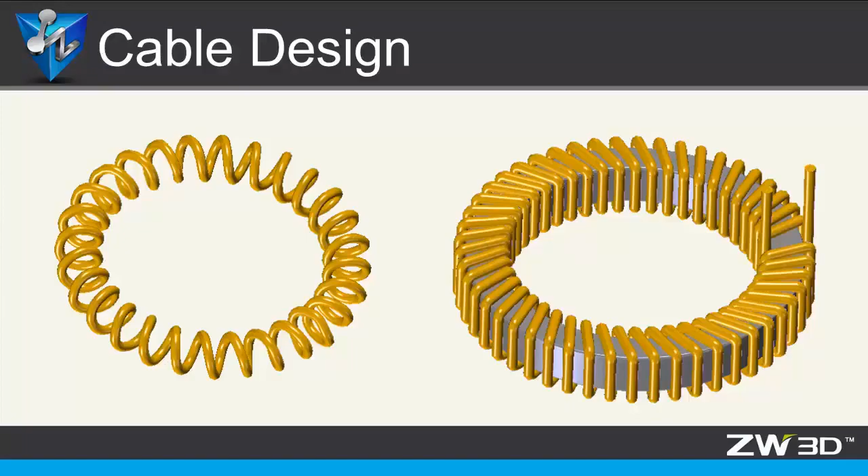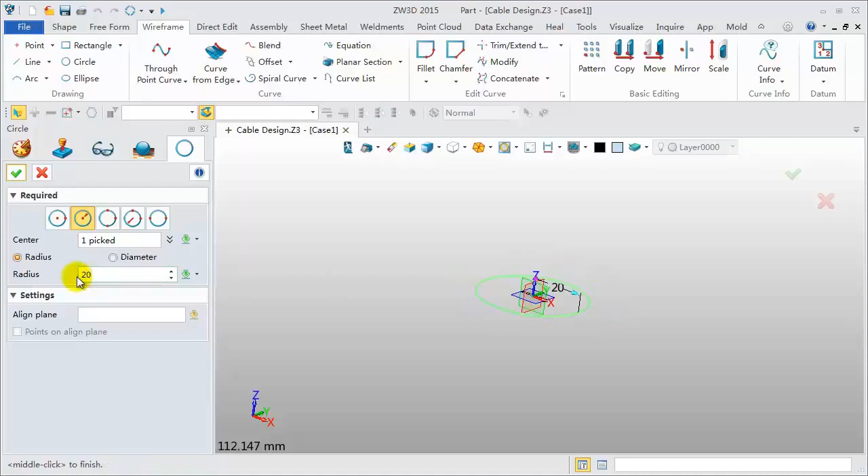Now, let's begin. Create a new file and name it Cable Design. Click the plus icon to create a new object. Name it Case 1. Click Wireframe, Circle. Pick the original point and set the radius to 20 millimeters. Click OK to finish.

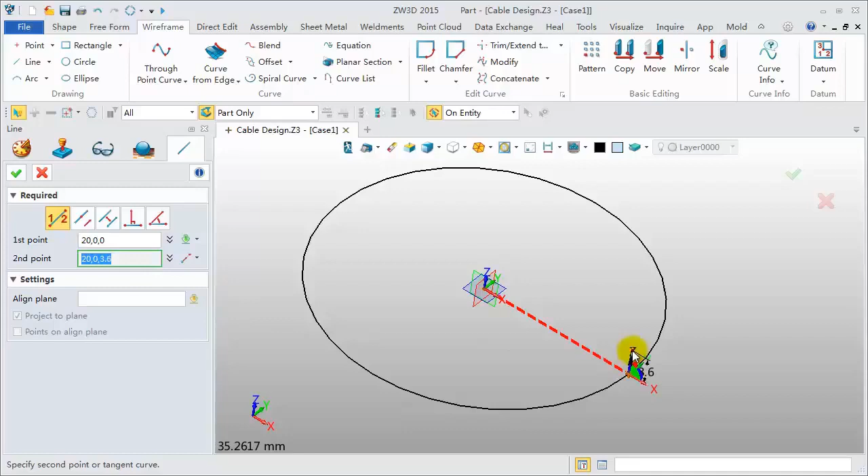Next, create a line. Hovering over the original point, move the mouse along the x-axis to the intersection. Continue to pick the second point. Distance is 3.6 millimeters.

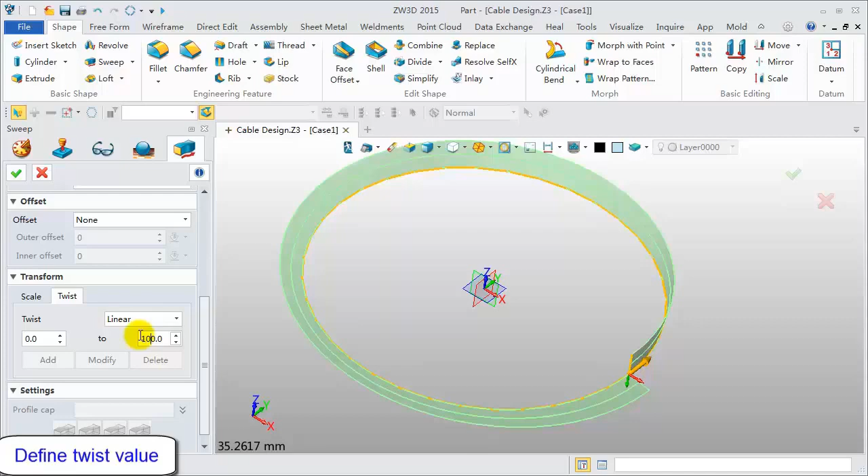Click the Sweep feature. Pick the line and the circle separately. Define the twist parameters. Linear change from 0 degrees to 10,000 degrees. This is the sweep result. Next, use Wireframe tool to extract the curve from the edge. Blank the sweep surface.

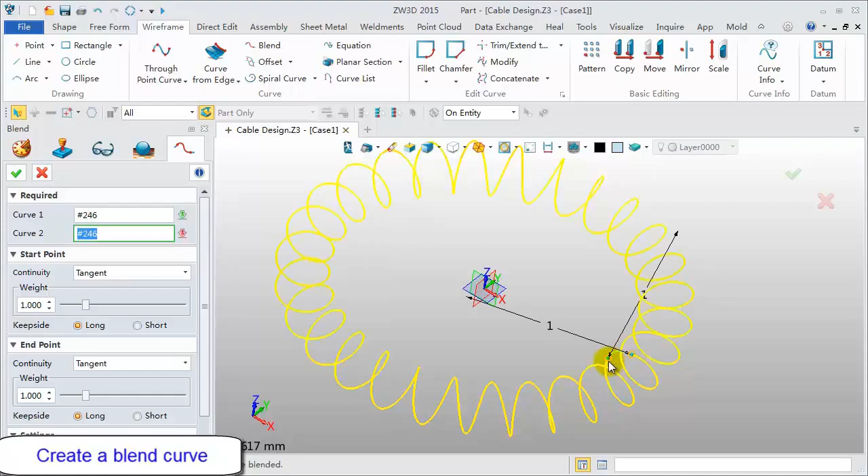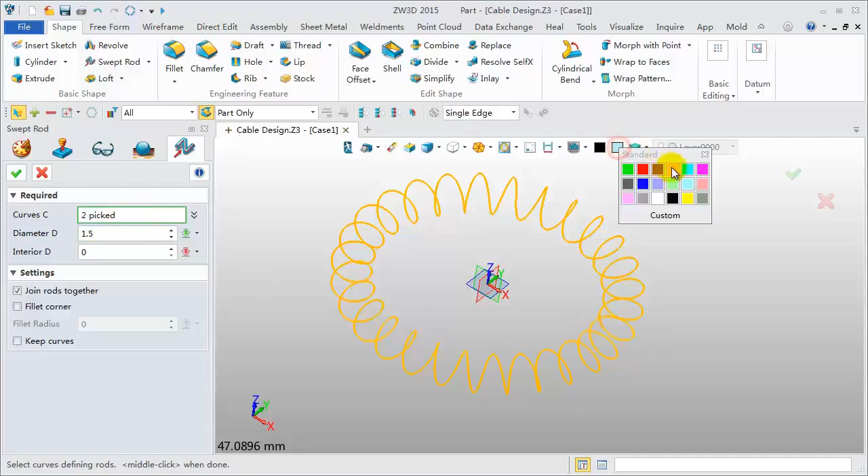Next, click Blend command to create a smooth connecting curve between the endpoints. Last, use Swept Rod feature to create shape. Pick curves. Diameter value is 1.5. Click OK to finish.

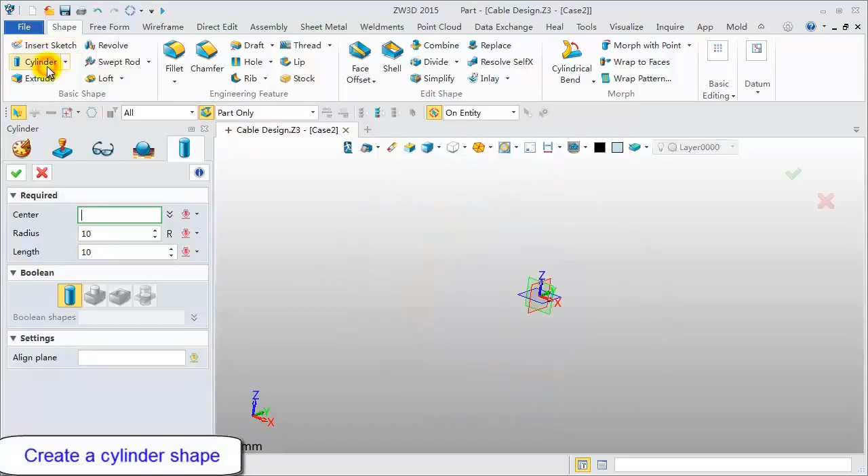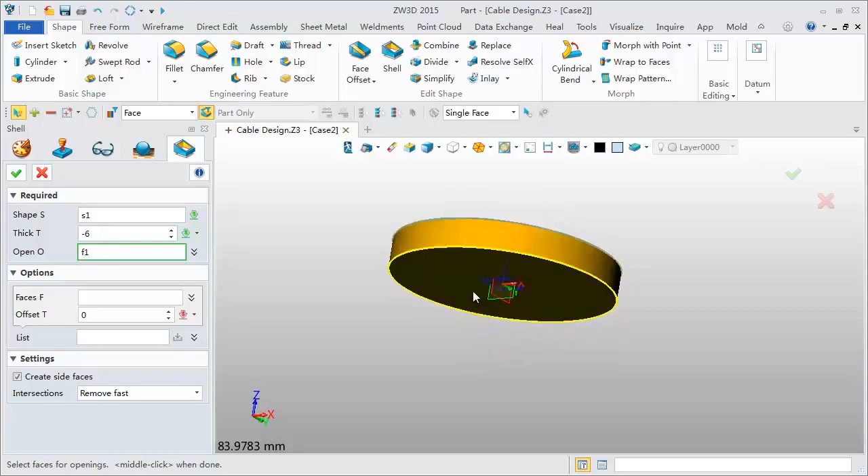Now, we will design another model. Click the plus icon to create a new object. Name it Case 2. Create a cylindrical shape, center located at the original point, radius 30, length 8. Next, do a shell operation. Pick the cylinder, set the thick value to -6. Pick the top face and bottom face as open, and click OK.

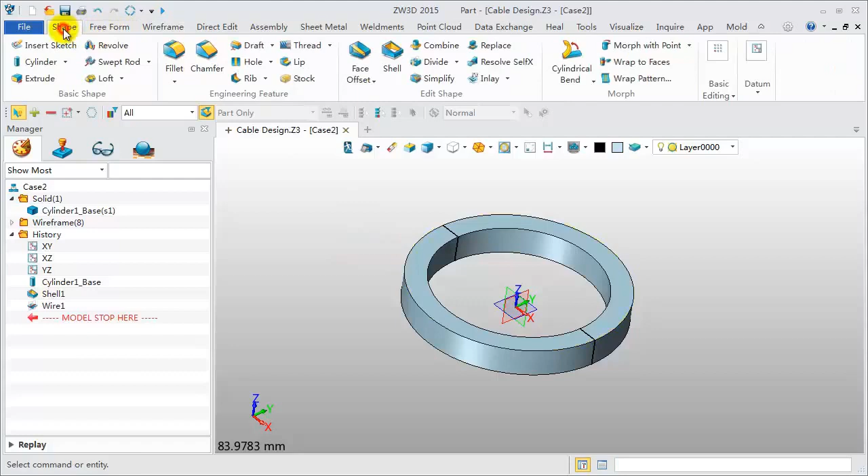Then, we will create the section line. Pick the InterX Curve feature. Select the shape and XZ datum. Get the intersection curve. Add fillet on the shape. Pick all edges and set the fillet value to 1 millimeter. Blank the shape. In the following, we will edit these section lines.

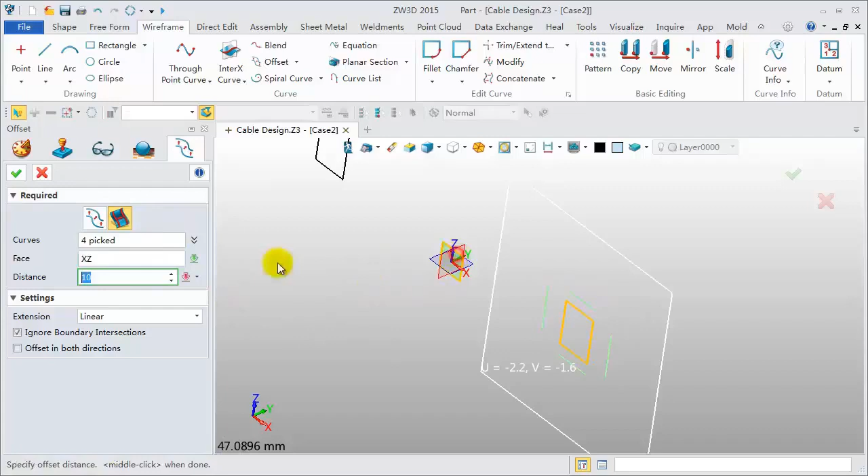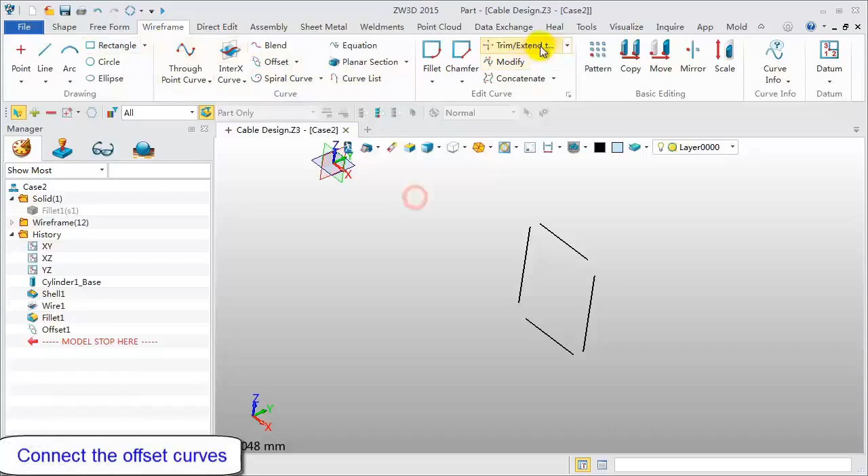Click Wireframe, Offset command, Offset on face. Pick these 4 lines in the XZ datum. Offset distance -1. Click OK. Blank the original lines. Now connect the offset curves with the Extend to Corner tool. Pick 2 adjacent lines. Middle click. Repeat the operation with middle click again.

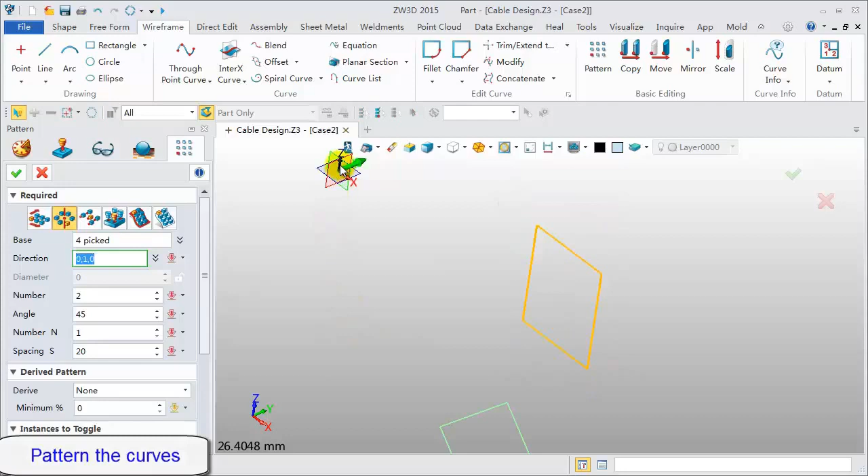Next, make a circular pattern. Pick curves, Z-axis, number 2, angle 7.2 degrees. Click the Line command. Pick 2 points to make a connecting line. Then add the fillet. Radius 1 millimeter.

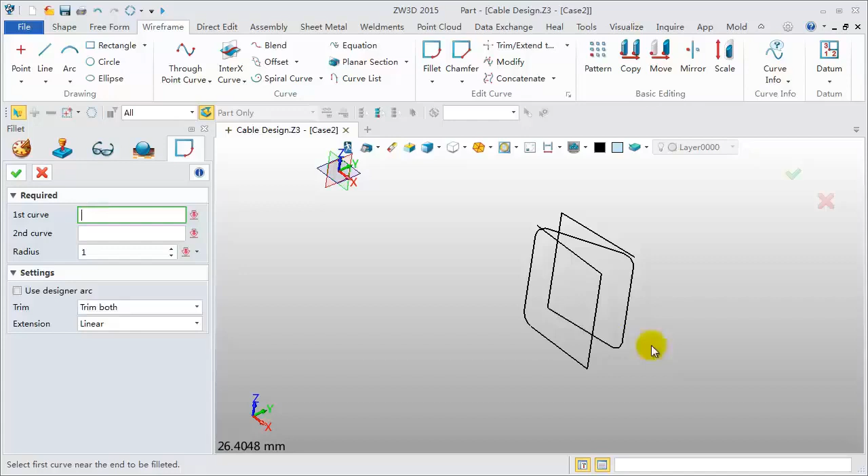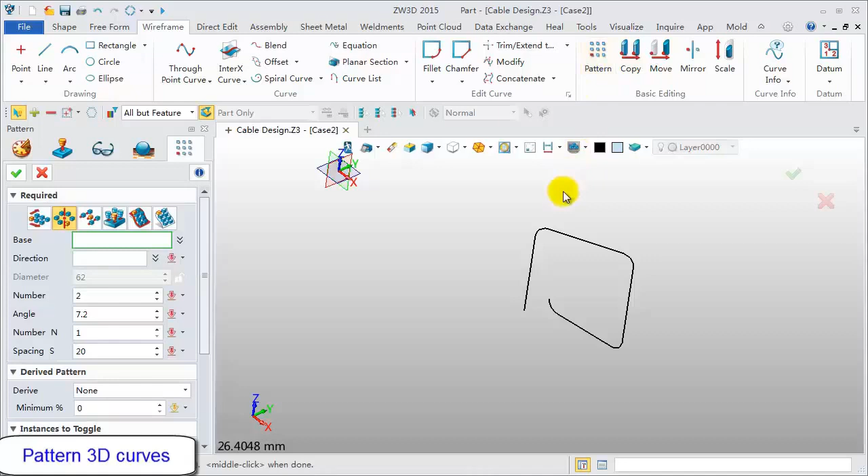Do them one by one. Middle click. Repeat the operation with middle click again. Delete some of the unneeded curves. Then pattern these 3D curves. Circle pattern. Pick all curves. Select Z-axis, number 50, angle 7.2 degrees.

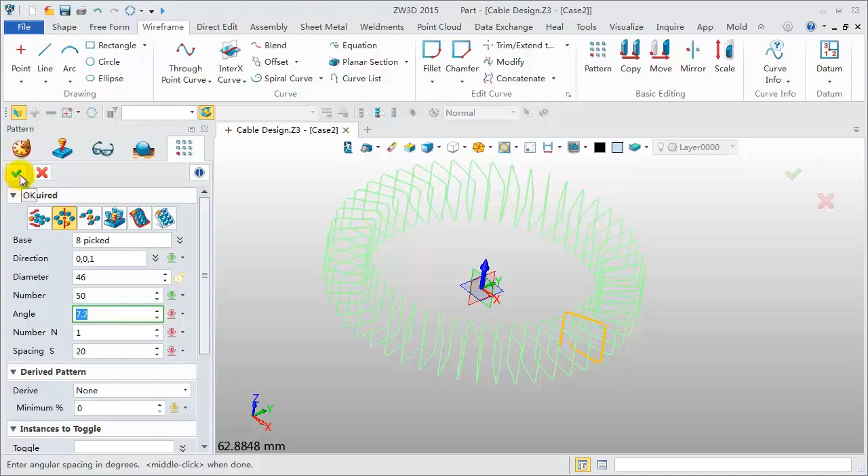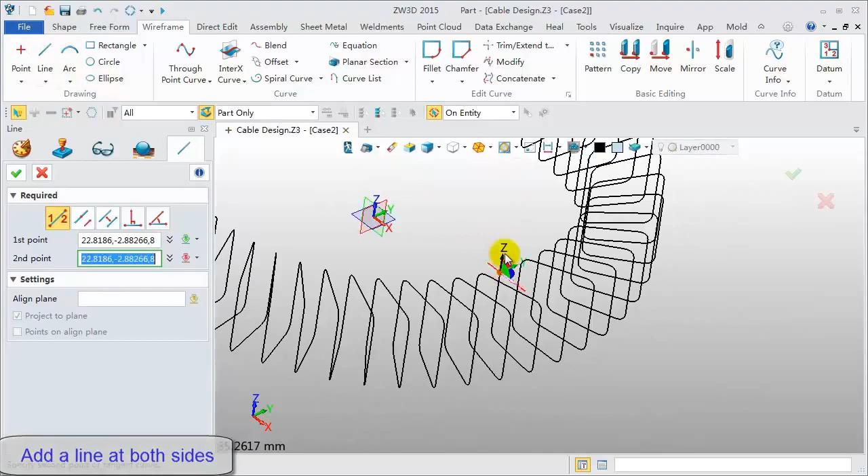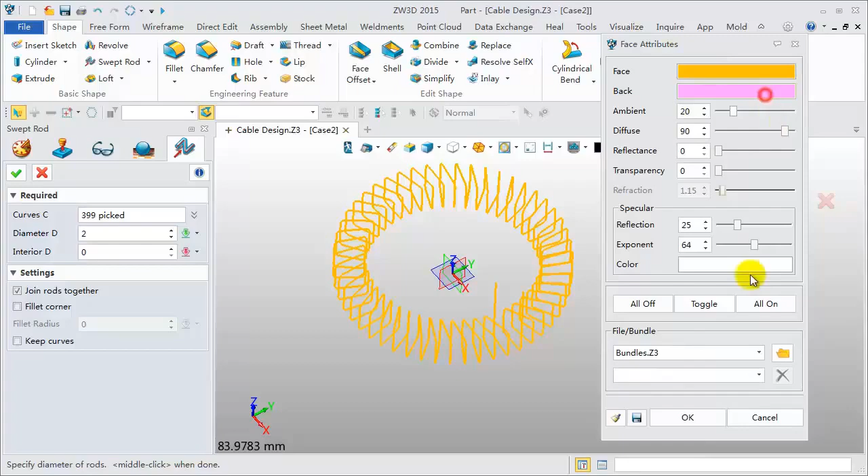Our desired model is open cable. So delete some of the unnecessary curves. Then add a line at both sides. Any length is okay. Click Sweep Rod. Pick all curves, diameter 2 millimeters. Assign a different face color. Click OK to be done.

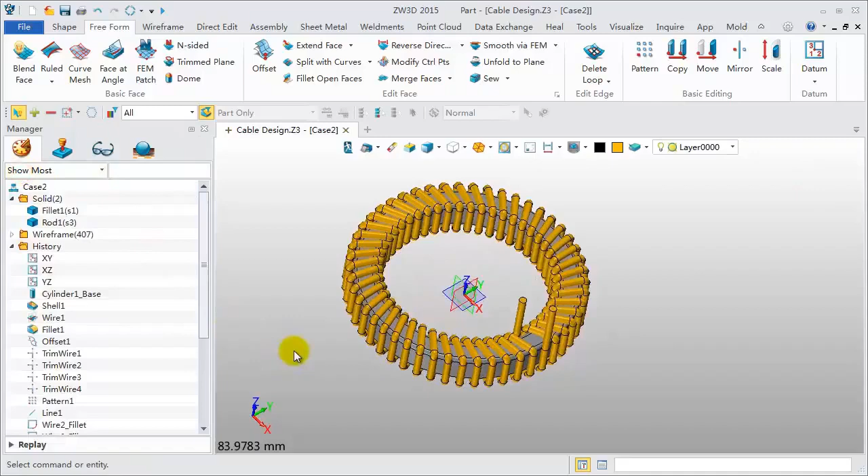Last, sew all surfaces together. Unblank all. Right-click on the first shape. Click Face Attribute to change the face color. OK? This is the final model. How about you? Try it out.